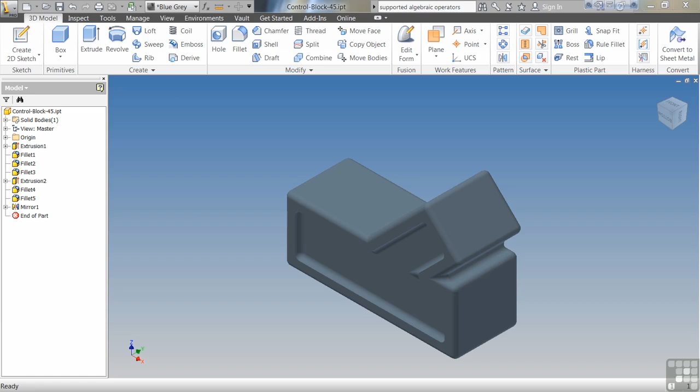In this exercise, we're going to be discussing using 3D grips. 3D grips are another way to edit a part.

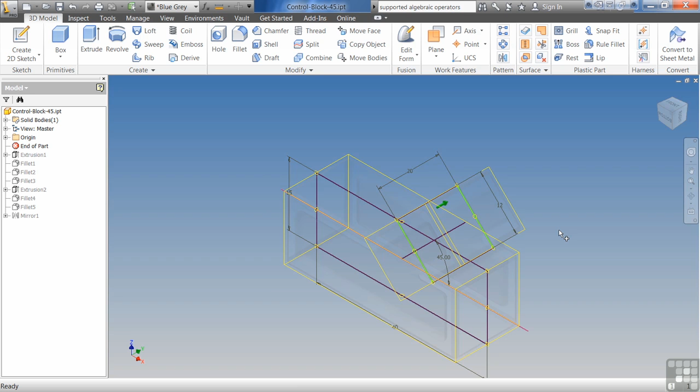So if I come over here to this part, I'm going to change my selection to be select faces and edges. I'm going to right click and say 3D grips. This gives me the ability to come in and modify this part just by using drag. If I hover over these little circles, I'll get the ability to drag that out. It actually overrides the dimension and allows me to change the part without even editing a dimension.

Come in here and make it wider, fatter. When I get done, I right click and say done. You can see that it updated that part to those new dimensions.

Some things it's going to break. It's not perfect. It's not even the best way to edit a part.

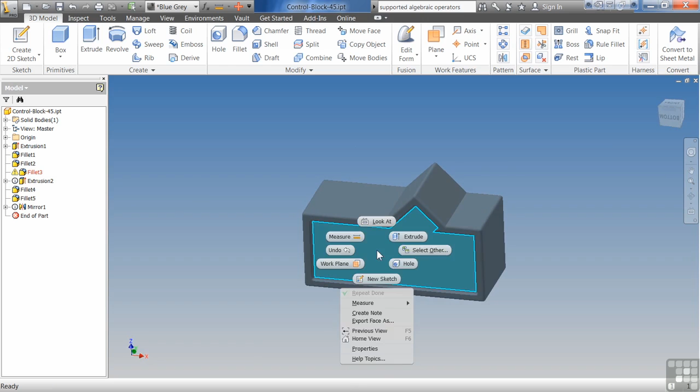But if you have a part that is a solid, for example, let me open up a solid here. Let's pretend like we got a part over from another program such as SolidWorks or Pro E where we just got a step file. So I'm going to open up this step here.

The first thing you'll notice about a step file is there's no features, meaning there's no way to edit this using our standard edit feature command.

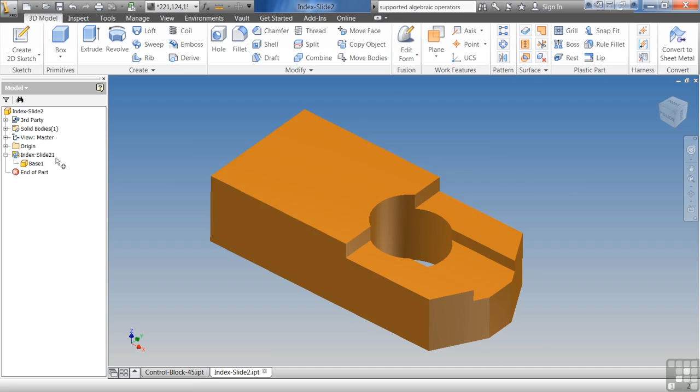So instead of coming in and editing the features, I can say edit form. It says, all right, select these bodies and tell it what you want to do. So I'm going to select this base feature and say edit form.

And what this does is it actually opens up a new program - Inventor Fusion. So now I have this part in here. It looks very similar to regular Inventor, but Fusion understands how to edit solids.

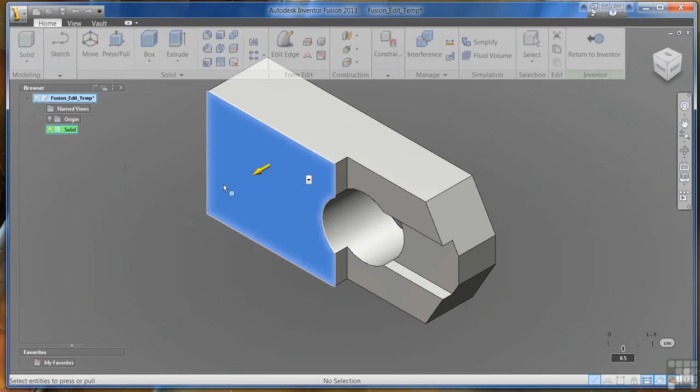So I can use press and pull, just like I did with those 3D grips, and change what it looks like. And you can see here, I can actually use dimensions and change what this part looks like based on dragging this around. See there? It can get very funky very quickly.

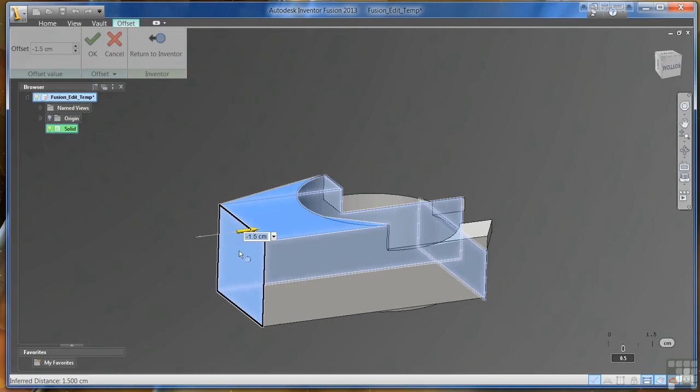I can actually come in here and add new extrusions and things to this. I can do that in Inventor as well, but we have a lot of options in here to do these 3D editing modifications. Move and press and pull are going to be your two biggest ones.

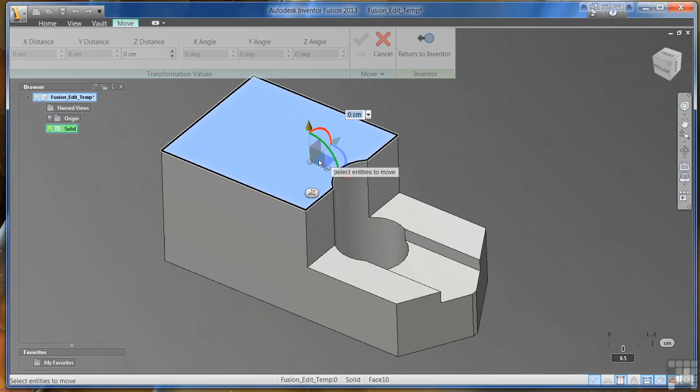So I can come in here and say, okay, how do I want to move this face? What I can do here is I can actually rotate it. You can come over here to another face and see I can do all types of things. Don't want to go too crazy there, but there we go. Inventor will let me do these weird things to this poor part.

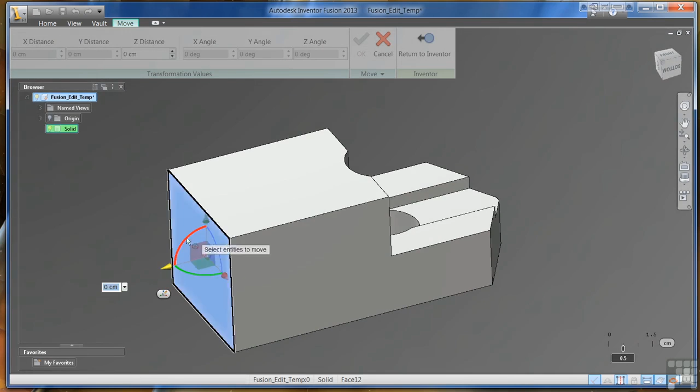Click, say OK. So whenever I get done, I say return to Inventor, and now I have this solid in Inventor.

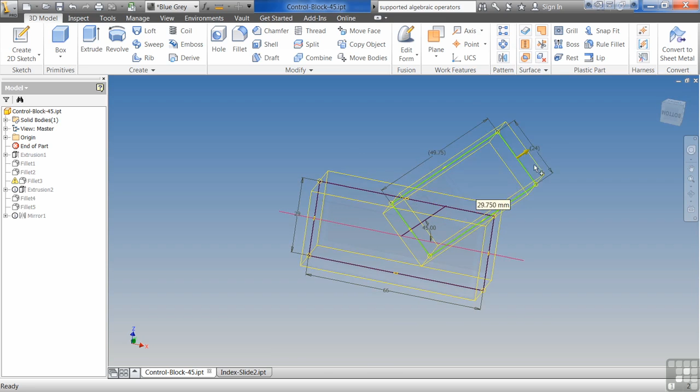So if I have features, I can just right click and go to 3D grips, which, like I said before, is very powerful, very cool. You can just drag these out, right click when you're done, and get something close to what you want.

If you do not have any history, you've gotten this in as an IGES or step file, you can go out using edit form and go out to Inventor Fusion.

3D grip editing is something that I always try to do as a last resort because I want to have that history. That's the idea of having a parametric based modeler, is having that history. So if I do any 3D grip editing or any freeform, it's always on solids or something I can't edit using the standard editing features. Know that it's there, but don't default to this. This is kind of a last resort type thing.

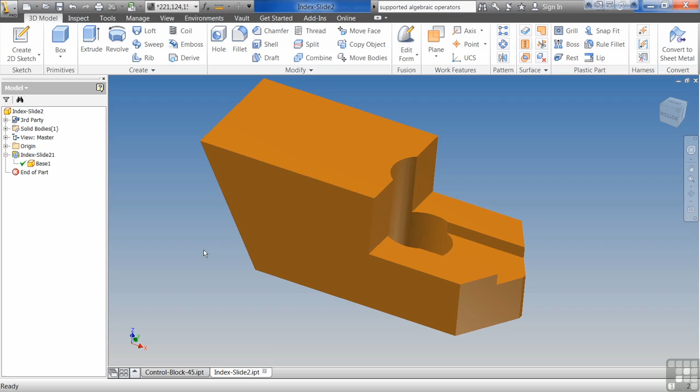But it is fun to play with, so open up this step file and then go out using edit form to Inventor Fusion, play with that a little bit and see what kind of fun, cool, crazy shapes you can end up with.